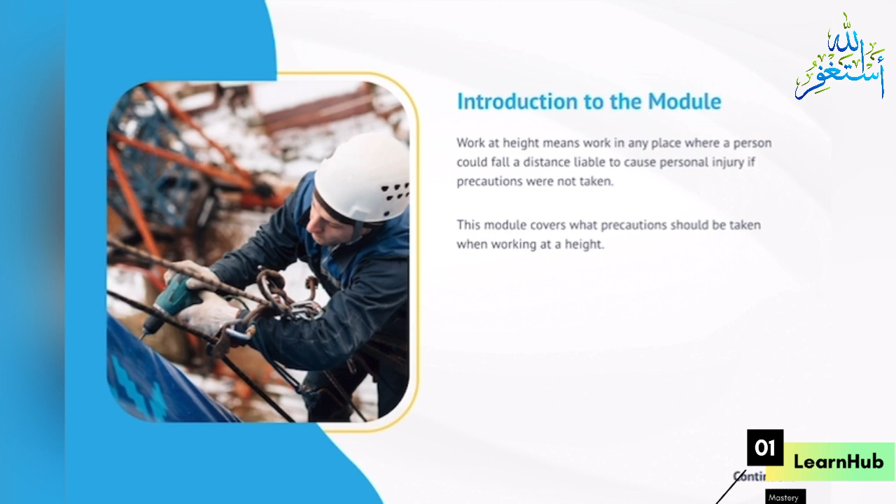Topics to be covered. Introduction. The Work at Height Regulations 2004, WAHR. Construction hazards and controls from working at height. Safe workplace. Injuries associated with falls from height. Working over water. The effect of deteriorating materials and weather.

Working above ground or where there is a risk of falling. Hazards and controls associated with working at height. Access equipment. Roof work. Protection of other persons.

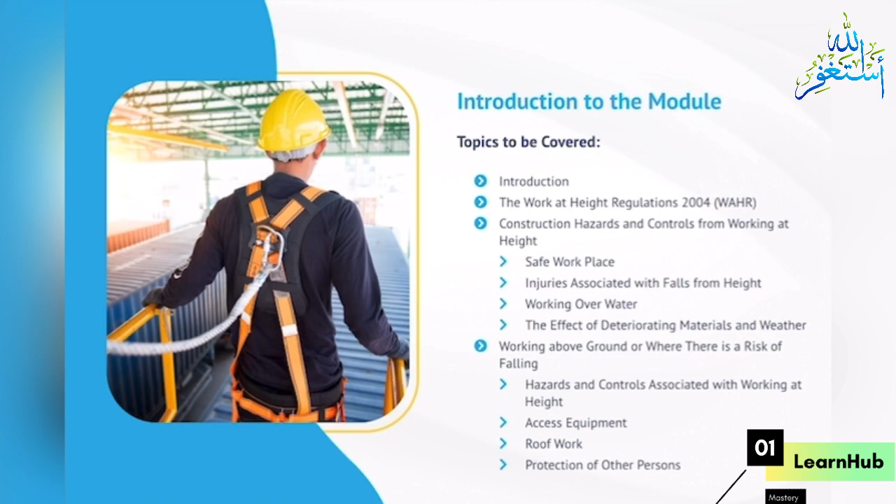Introduction. Work at height accounts for about 50 to 60 deaths, more than any other workplace activity, and 4,000 injuries each year. During the first 2 weeks of June 2003, inspectors from the Health and Safety Executive visited 1,446 construction sites and stopped all work at 1/4 of them due to concerns about the level of risks of falls from height. Another 5% of sites visited were issued with improvement notices.

The Work at Height regulations affect approximately 3 million workers where working at height is essential to their work. Amongst other measures, the height of guardrails on scaffolds is increased by 40 mm to 950 mm, thus recognizing that the average size of workers has grown over the last 40 years.

The design of construction projects can also reduce health and safety hazards and accident rates. A study of accident data on falls from a height over the 5 years from 1996 until 2001 emphasized the importance of building design and eliminating work at height hazards.

The Work at Height Regulations 2004, WAHR. The WAHR has no minimum height requirement for work at height. They include all work activities where there is a need to control a risk of falling a distance liable to cause personal injury. This is regardless of the work equipment being used, the duration of the work at the height involved, or the height at which the work is performed. It includes access to and egress from a place of work.

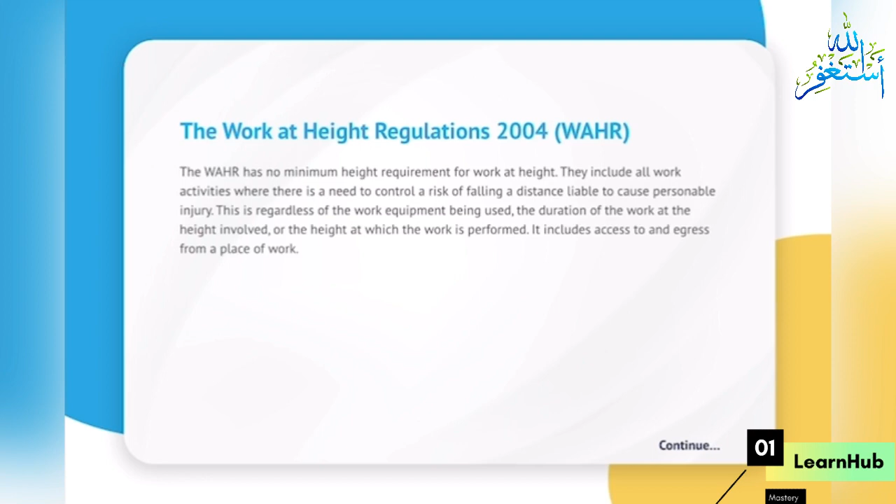It would therefore include working on a scaffold or from a mobile elevated work platform, MEWP. Sheeting a lorry or dipping a road tanker. Working on the top of a container in a dock, ship, or in a storage facility. Tree surgery and other high-altitude forestry work. Using cradles or rope to get access to a building or other structure, such as a ship under repair.

Climbing on fixed structures such as a gantry or a telephone pole. Working near an excavation area or cellar opening where a person could fall in and get injured. Painting or pasting and erecting bill posters at height. Work on staging or trestles, for example for filming or events.

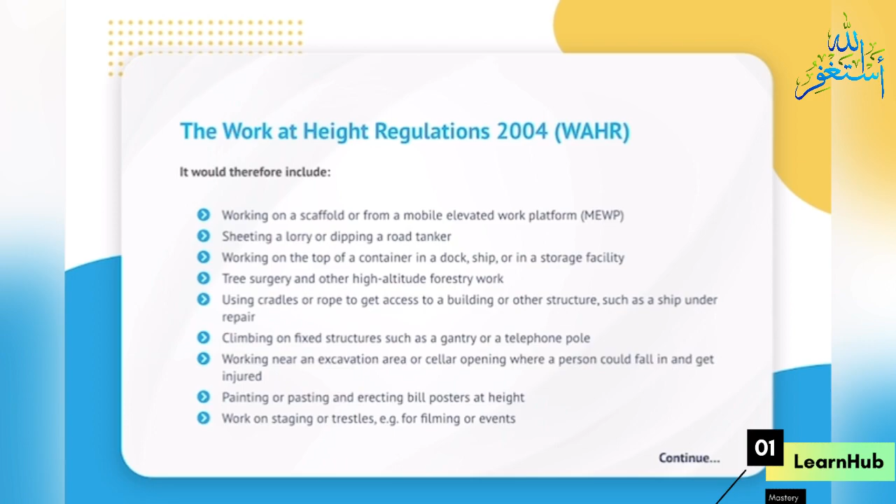However, it would not include slips, trips and falls on the same level. Falls on permanent stairs if there is no structural or maintenance work being done. Work on the top floor of a multi-story building where there is no risk of falling.

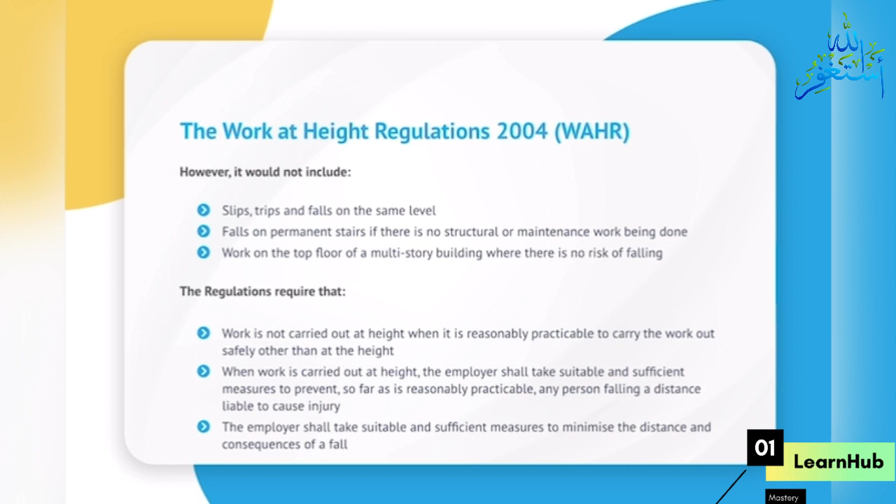The regulations require that work is not carried out at height when it is reasonably practicable to carry the work out safely other than at height. When work is carried out at height, the employer shall take suitable and sufficient measures to prevent, so far as is reasonably practicable, any person falling a distance liable to cause injury. The employer shall take suitable and sufficient measures to minimize the distance and consequences of a fall.

Construction hazards and controls from working at height. Safe workplace. Safe access to and egress from the place of work is essential when working at height. All working platforms, ladders, scaffolds, gangways and passenger and materials hoists must be safe for use and be subject to regular inspection. Working platforms should also be kept as clear and clean as possible to avoid slips and trips and the accidental loss of material to the ground below.

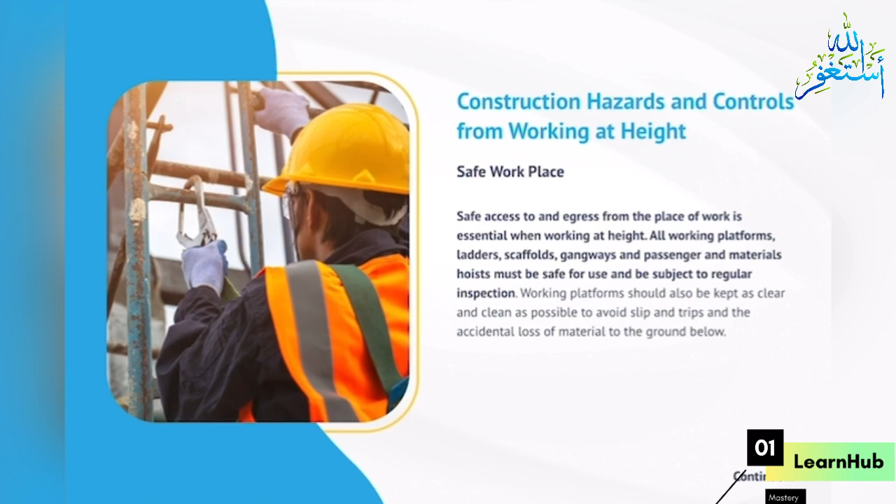Injuries associated with falls from height. Falls from great heights can cause fractures, severe head injuries, and, in extreme cases, death. As a result, it is essential that particular precautions be taken to protect personnel when they are operating at heights.

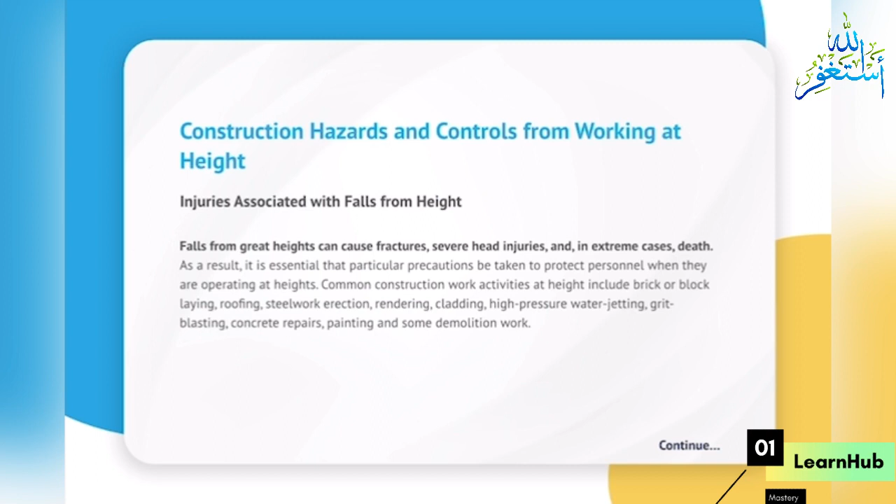Common construction work activities at height include brick or block laying, roofing, steelwork erection, rendering, cladding, high-pressure water jetting, grit blasting, concrete repairs, painting and some demolition work. For all these activities, safe systems of work are essential.

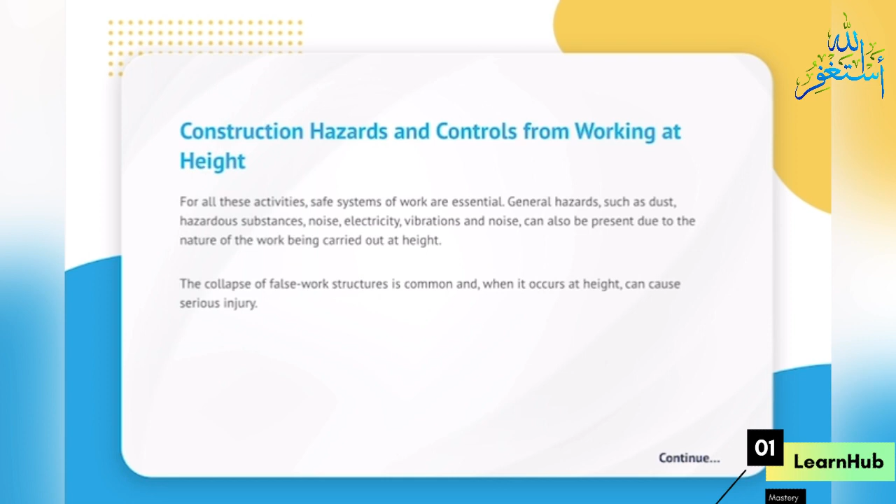General hazards, such as dust, hazardous substances, noise, electricity and vibration, can also be present due to the nature of the work being carried out at height. The collapse of falsework structures is common and, when it occurs at height, can cause serious injury. The majority of accidents caused by the collapse of falsework are the result of a lack of communication between the many trades that employ it and their suppliers or erectors.

The cleaning of buildings and monuments involves the use of hazardous techniques such as grit blasting or high-pressure water jets, which is often done from scaffolding or even ladders. With both these techniques, care is needed to protect the workers, the occupiers of the building and passers-by from hazards such as noise, dust, falling debris and possible flooding of walkways.

The equipment must be maintained and inspected regularly, and operatives provided with training, supervision and suitable personal protective equipment: goggles, ear defenders and gloves, and waterproof clothing.

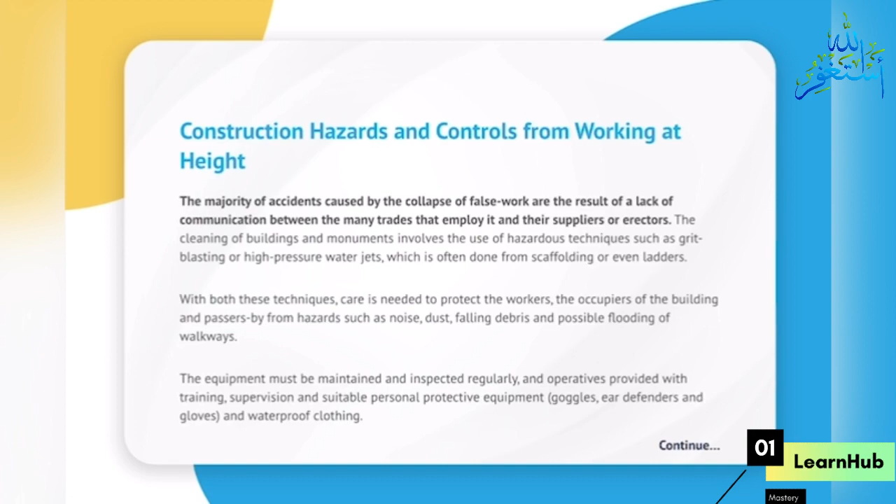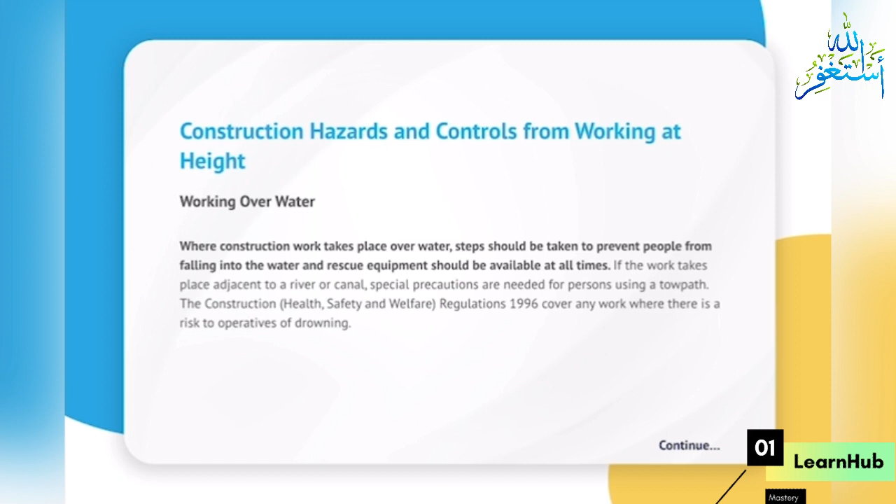Working over water. Where construction work takes place over water, steps should be taken to prevent people from falling into the water and rescue equipment should be available at all times. If the work takes place adjacent to a river or canal, special precautions are needed for persons using a towpath. The Construction (Health, Safety and Welfare) Regulations 1996 cover any work where there is a risk to operatives of drowning.

At the planning stage of any work over or beside the water, the following points need to be considered. The provision of suitable fencing to ensure that persons do not fall into the water by the condition of barriers or fences with toe boards. The provision of life jackets, buoyancy aids and grab lines, fast-flowing water like rivers. The provision of rescue equipment, life belts, harnesses, safety lines, and in some cases, a rescue boat.

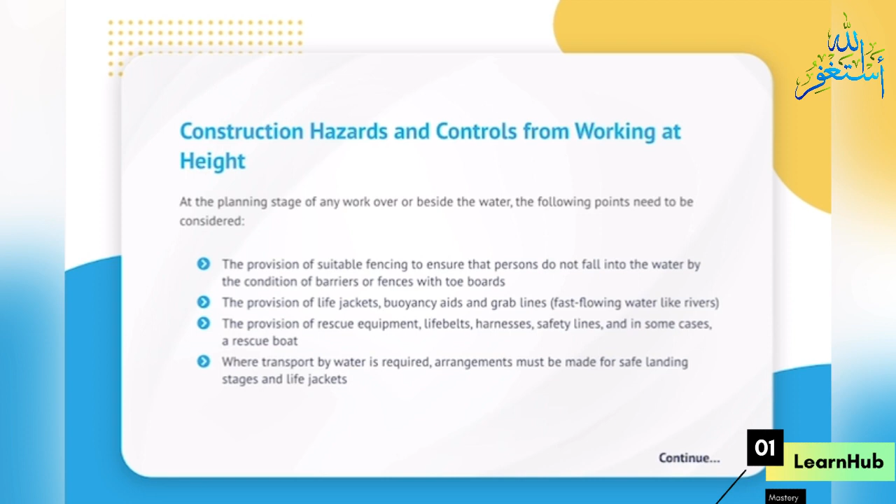Where transport by water is required, arrangements must be made for safe landing stages and life jackets. When boats are used, they should be of suitable construction, under the control of a competent person, not overloaded and adequately maintained. Specific training for boat operatives, rescue teams and supervisors.

All precautions must also protect the safety of the public, especially children. Suitable security measures will be necessary to prevent the theft of rescue equipment and boats outside working hours. Weather, tides and flooding conditions must be taken into account when planning rescue measures and using boats as transport.

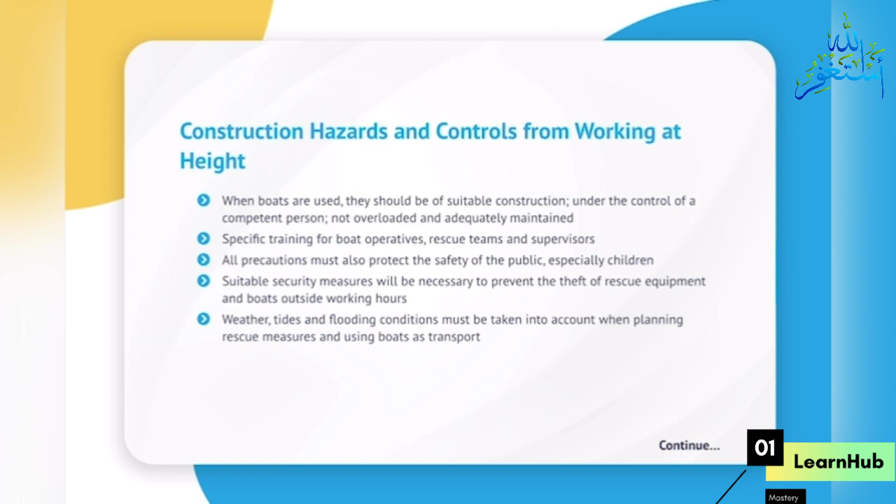The effect of deteriorating materials and weather. As many materials age, they become brittle, weaker and less stable. It is also a problem in other situations found in construction work, such as refurbishment work and the various cladding materials, including asbestos, used inside and outside buildings.

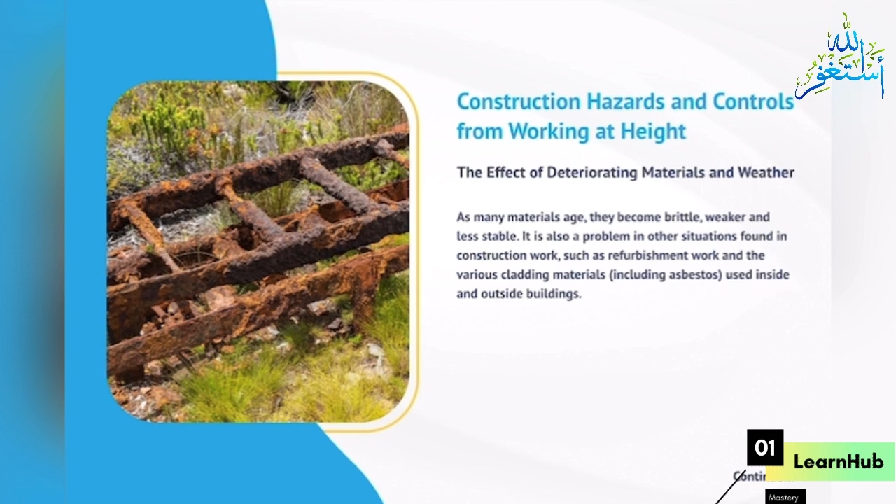They can affect the work process by displacing tools and materials and cause injuries to persons working at height or those below the workings. Such winds, if strong enough, can also lift roofing tiles or sheets, particularly if the roof is only partially completed. Such problems often occur outside normal working hours, causing injuries to members of the public, including trespassers, and damage to neighboring properties.

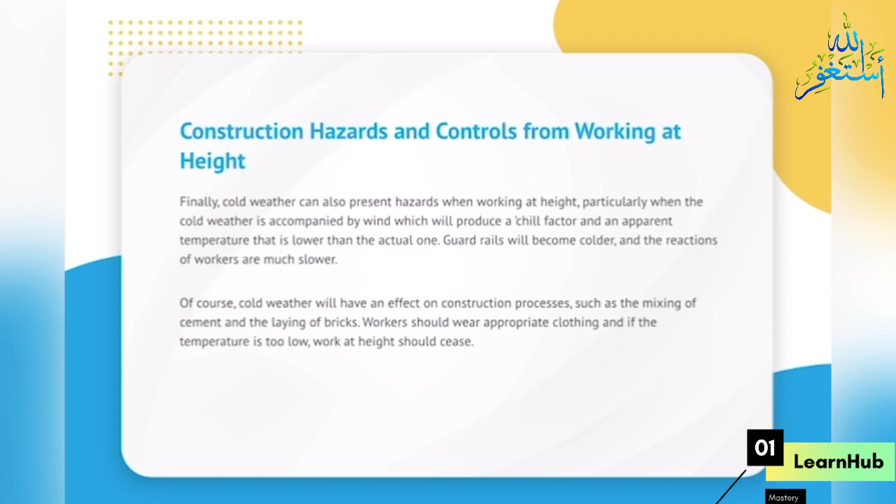Finally, cold weather can also present hazards when working at height, particularly when the cold weather is accompanied by wind which will produce a chill factor and an apparent temperature that is lower than the actual one. Guardrails will become colder, and the reactions of workers are much slower. Of course, cold weather will have an effect on construction processes, such as the mixing of cement and the laying of bricks. Workers should wear appropriate clothing, and if the temperature is too low, work at height should cease.

Working above ground or where there is a risk of falling. Hazards and controls associated with working at height. Work at any height involves a risk of falling. The significance of injuries resulting from falls from height, such as fatalities and other serious major injuries, have been dealt with earlier in this chapter, as has the importance and legal requirements for head protection.

The primary means of preventing falls of people or materials include the use of fencing, guardrails, toe boards, working platforms, access boards, ladder hoops, safety nets and safety harnesses. Safety harnesses prevent the fall by limiting the fall to a specific distance due to the harness's attachment to a point on an adjacent rigid structure.

Access equipment. There are many different types of access equipment, but only the following 4 categories will be considered here. Ladders. Fixed scaffolds. Mobile scaffold towers. Mobile elevated work platforms.

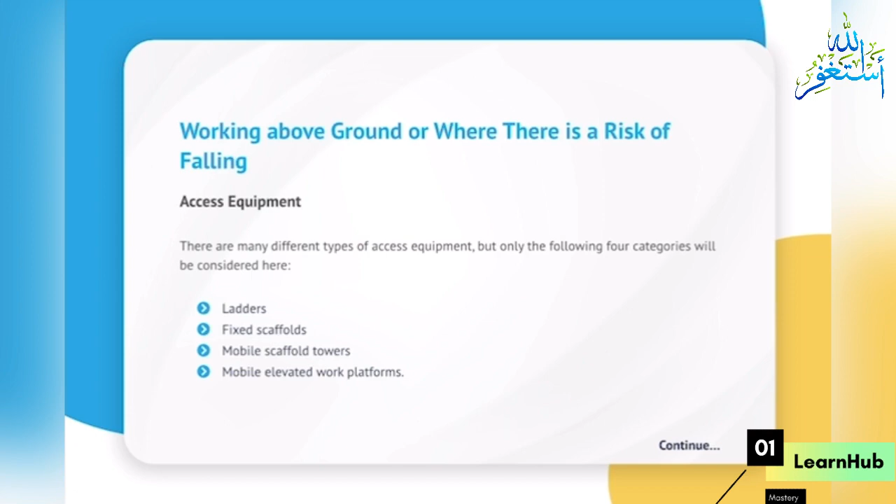Roof work. Before any roof work is started, a risk assessment should be undertaken. This should include assessing the roof's structural integrity and the methods to be used to repair the top and a COSHH assessment of any hazardous substances to be used. The precautions needed when repairing the flat roof of a building include the provision of safe access to the roof, using scaffolding and/or ladders, the use of crawling boards, the provision of safety harnesses and edge protection, using toe boards, to prevent the fall of persons or materials.

Roof battens should be checked to ensure they provide safe hand and footholds. If they do not, then crawling ladders or boards will be used. Crawling boards should always be provided when work on fragile roofing materials cannot be avoided. The roof's perimeter requires a 2-rail scaffold guardrail fitting together with a toe board where the gutter would not prevent materials from slipping from the roof.

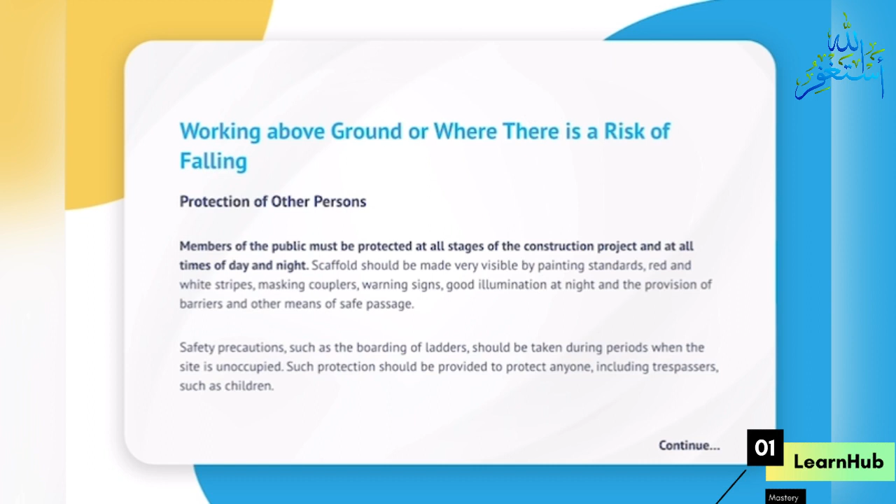Protection of other persons. Members of the public must be protected at all stages of the construction project and at all times of day and night. Scaffold should be made very visible by painting standards red and white stripes, masking couplers, warning signs, good illumination at night and the provision of barriers and other means of safe passage. Safety precautions, such as the boarding of ladders, should be taken during periods when the site is unoccupied. Such protection should be provided to protect anyone, including trespassers, such as children.

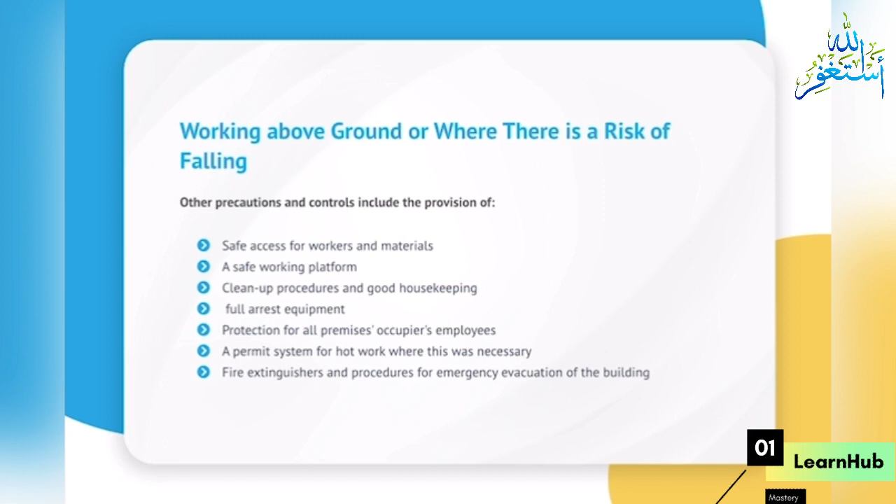Other precautions and controls include the provision of safe access for workers and materials, a safe working platform, cleanup procedures and good housekeeping, fall arrest equipment, protection for all premises occupiers' employees, a permit system for hot work where this was necessary, fire extinguishers and procedures for emergency evacuation of the building.

Summary. In this module, we have covered work at height accounts for about 50 to 60 deaths, more than any other workplace activity, and 4,000 injuries each year. Falls from height can result in fractures, severe head injuries and, in some cases, death. The majority of accidents caused by the collapse of falsework are the result of a lack of communication between the many trades that employ it.

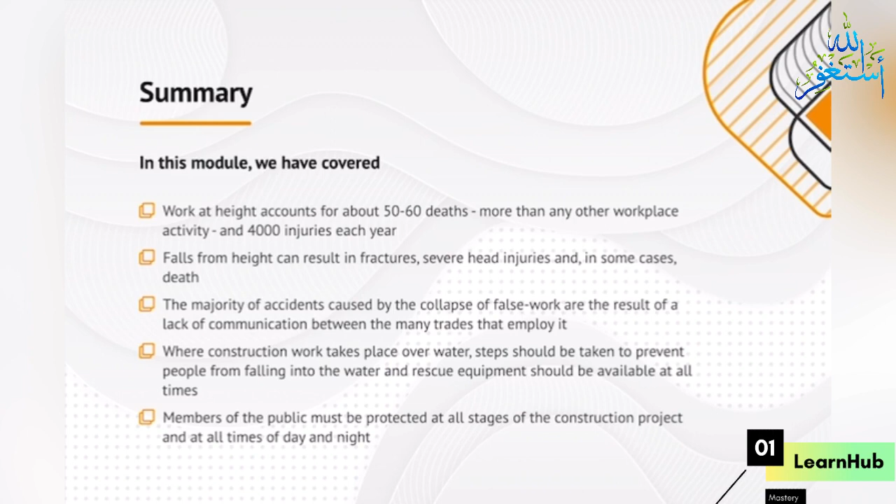Where construction work takes place over water, steps should be taken to prevent people from falling into the water and rescue equipment should be available at all times. Members of the public must be protected at all stages of the construction project and at all times of day and night.